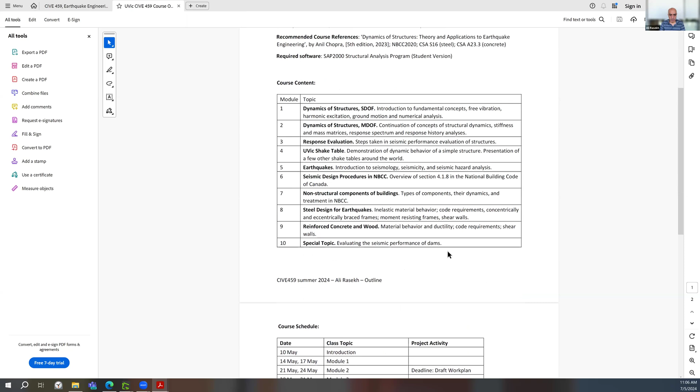Now the picture looks okay, I think we're in good shape. In terms of module, we are somewhere here. We are still working on the National Building Code of Canada between module 6 and 7, and that's the two most important modules of the course. So it's okay if we are slightly delayed.

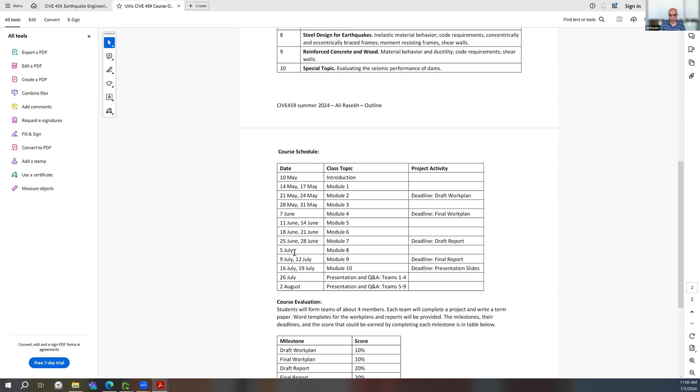In terms of scheduling, we are already into July, and in terms of timing, we are delayed. I will do some other parts faster, as if it's a conference, but I don't mind spending time on National Building Code of Canada. Besides, these two sessions won't be as busy as I initially estimated.

I talked to Benham Siler. I mean, probably mostly my fault - I didn't chase marking your draft reports soon enough. I got carried away by the end of week, long weekend, vacation, etc., and now we are slightly behind.

I'll try my best to give you feedback on the draft report by Monday. However, it would already be late for your July 19 deadline - no sorry, July 12 deadline. So here we said your deadline is July 12.

We give you one week to apply the comments that we give you. So for now, I extend the final report deadline to July 15. Tell me if it doesn't look okay, etc. Let me know, otherwise I can note it here. And I will send an email as well.

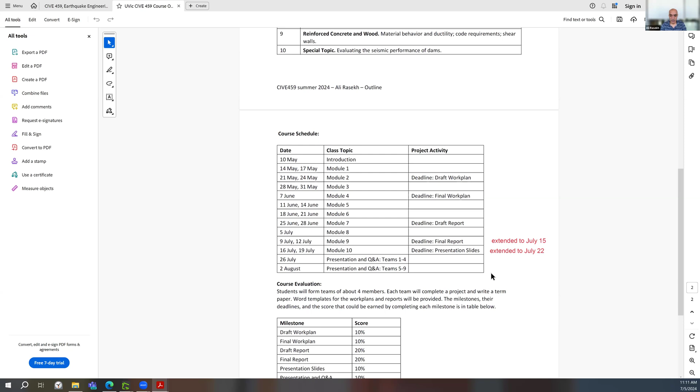General form of the outline will remain the same. Scoring remains the same.

Some questions came up about class presence and quiz. As I said, I emailed back one team saying that as long as I see class presence order of 25 - which is not today, we have only 21 - I don't feel urgency for checking class presence, but now I'm feeling it slightly. So 21 is not yet 25. Maybe some people will join us in a few minutes.

And quiz, yeah. So eventually we should somehow make up this 20%, although I'm not a quiz-giving person, but I have to do it. I committed to it now. I will inform you, maybe next session, next Tuesday - I will email you on Monday and say tomorrow we have a quiz.

By quiz, what we mean is that it will be a simple question, completely fine to check your books and notes and Google search, ChatGPT, etc. However, I'd like you guys not to talk to each other - you should do it independently. It's not intended to be a difficult, in-depth question. That part you are tested through your reports, where you have in-depth knowledge, and you will present to prove that you have in-depth knowledge.

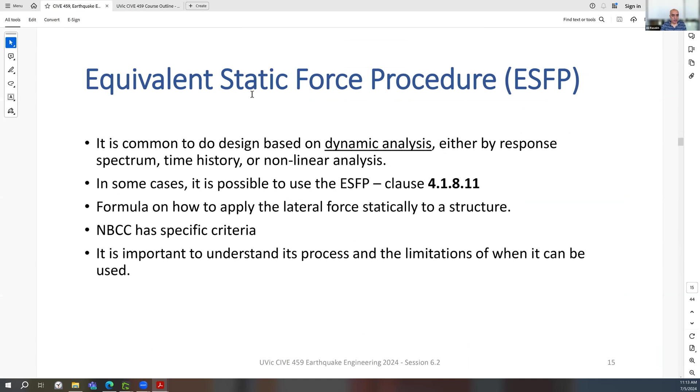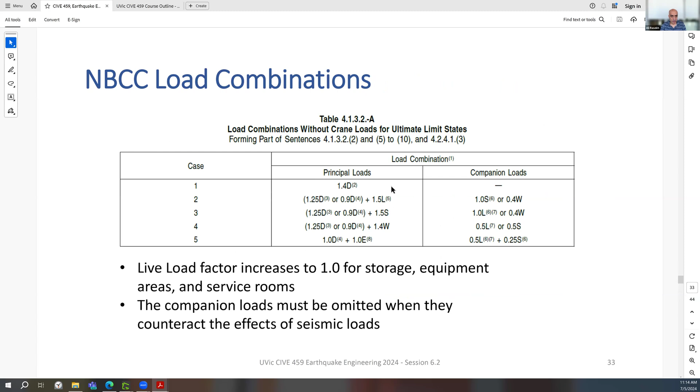Let me see where we can continue from. I remember we went through accidental torsion, and we were at the modern design philosophy. I don't mind going through this one more time.

I highly recommend that you guys really learn and review at least the slideshows for NBCC. Just go through them a few times, practice, etc. I understand some people say they're not too interested in dynamics of structures, but since you're taking this course, you should really be fluent with the design philosophy at a high level for all codes.

We explained the details for using the National Building Code of Canada procedure, the equivalent static method, distribution of the load between different floors, seismic load, and how to modify for higher modes, which meant increasing the base shear and reducing the overturning moment. We went through those processes, and I urge you to more deeply learn that than other sections.

Now we go higher level, to what every code in the world thinks about when discussing design philosophy. This has been popular for maybe the past 50 years or so, using the design spectrum, etc. That's the modern seismic design philosophy, which has been successful, and the quality of design has been improving all the time. This is good knowledge to have as a seismic structural engineer.

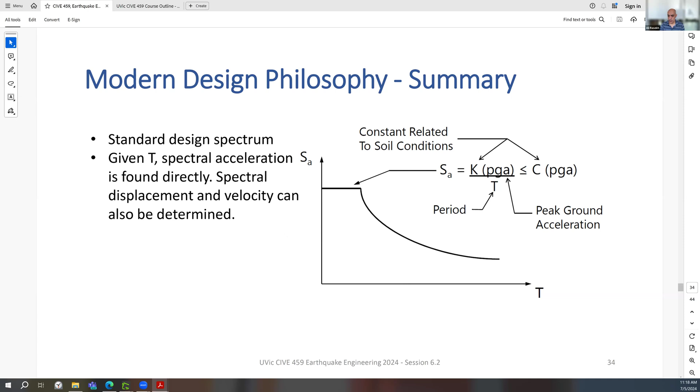Spectral displacement and spectral velocity are also important, and they have a relation with spectral acceleration, so you can determine those as well. That's the general procedure that's repeated in every code around the world on seismic design.

Another important notion to always be aware of, which you should look for in every code including the Canadian code, is that there is an elastic demand spectrum the code guides you to build. It's basically asking: what if the structure remains completely elastic with 5% damping throughout the earthquake? Then the code gives you a reduction factor to reduce it.

Sometimes we don't build this second curve, which is called the elastic design spectrum, because although the nonlinearity is accounted for here, you use the elastic results, elastic stresses or elastic forces. So it remains elastic because when you use this curve and determine the forces, you apply those forces.

on the elastic model of the structure. However, the nonlinearities and ductilities are accounted for by this reduction factor. Most of the time, we don't really build this; we build the higher one. We determine the SAE, and then we use the modification factor or reduction factors, such as what I showed you in the Canadian code, to reduce SAE to SAD.

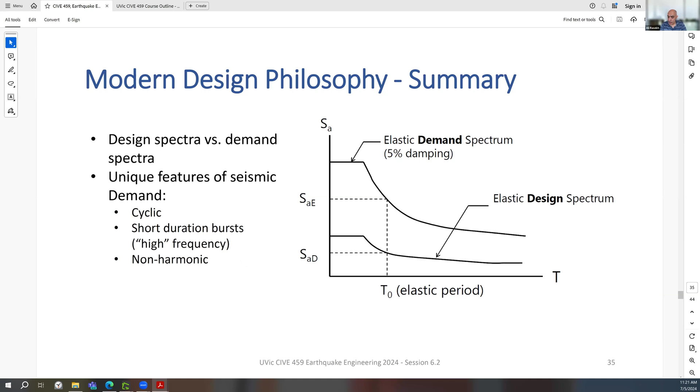Going to the next one, just reviewing the two reasons we use that modification ratio—instead of using SAE to determine the load, we reduce it to SAD. In the Canadian code, they are separated. One feature is that because the structure becomes nonlinear and ductile, the demand reduces.

The structure doesn't remain as stiff, therefore it won't have as much demand. The second feature is the overstrength—while we try to design our structure for one capacity, we're really designing for a different capacity. So the overstrength factor also comes in, and the combination of these two features is where we reduce the demand on the structure: one step from SAE to SAU to account for ductility, and another step from SAU to SAD to account for overstrength. That's the basis for seismic design philosophy in a way.

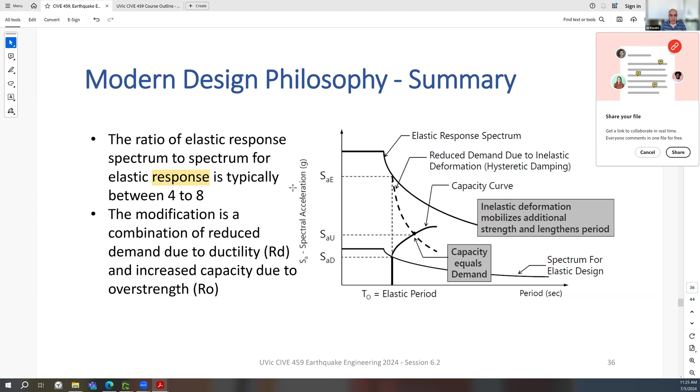And the dynamic characteristics also change. The period normally increases, and in most cases, an increase in period means a reduction in demand—you see these curves like this. So this reduction is partially because the period has increased, and when the period increases, you go down on this curve. That's part of the benefit of ductility, besides the fact that it dissipates energy. So altering dynamic characteristics is beneficial to us.

Normally we think about steel when we see this curve, and that's the way steel behaves: it yields, and then during its deformation, it keeps on dissipating energy. While if you have a member which doesn't yield, energy dissipation is low, there's a higher force, and the period doesn't reduce.

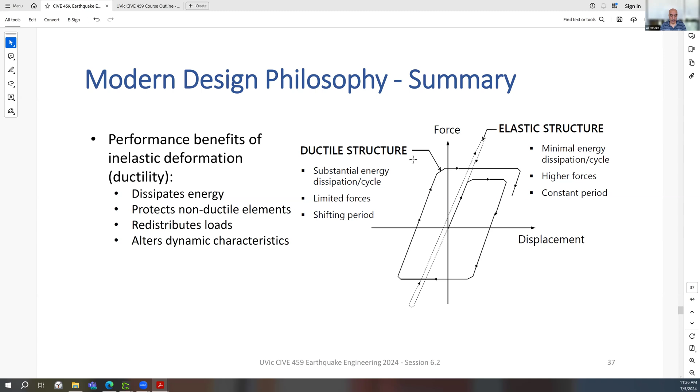For concrete, by nature it's more like not showing ductility, but by providing proper detailing and reinforcing, we push it to behave more like steel. Steel is like our poster child, the ultimate ideal for structural design, and we try to make concrete behave the same, or even wood behave the same—making them act more ductile through proper detailing, connections, etc., or use of steel basically within them.

We talked about the response spectrum curves—the real response spectrum curve, which looks crooked, and one that you prepare using the code, which is a design spectrum, made of a few flat lines in the Canadian case, or in most other codes, a flat part and a curved part, which mimics basically the real spectrum.

Re-emphasizing that even in a real case, when the structure softens and the period increases, we have lower demand. The elastic structure had a period of T prime, but it softened because it yielded. The period increased to T double prime, and therefore the demand is less.

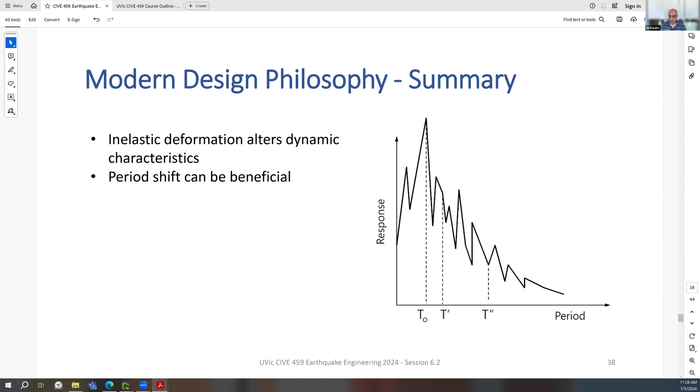We want to have at least one ductile member in between as part of the chain that carries the force to the ground, and we need to capacity protect every other member because we want the ductile member to be what we call the weak link. We want the ductile member to fail in case of emergency, in case of earthquake, because other members will have a brittle failure. We don't like that - it's a sudden failure. The structure might collapse and have more damage to life and more economic losses as well.

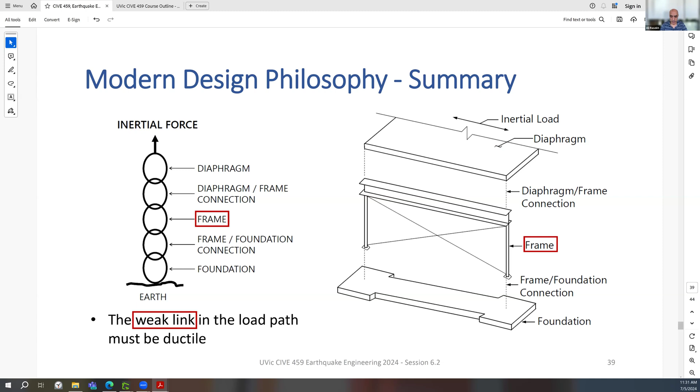So, modern design philosophy in summary, comparing two frame designs: Frame design A and frame design B both have the same stiffness. In terms of the load displacement, they might even have the same stiffness, so the elastic force would be the same for both structures, and frame A has greater design capacity than frame B.

Frame A sustains a greater static load, such as wind load. Frame A yields later, at a greater load, than frame B, and the elastic force would be the same in both frames - both result in the same elastic forces. Frame A has a larger capacity than frame B. Therefore, when you design for wind, you assume that frame A is stronger than frame B.

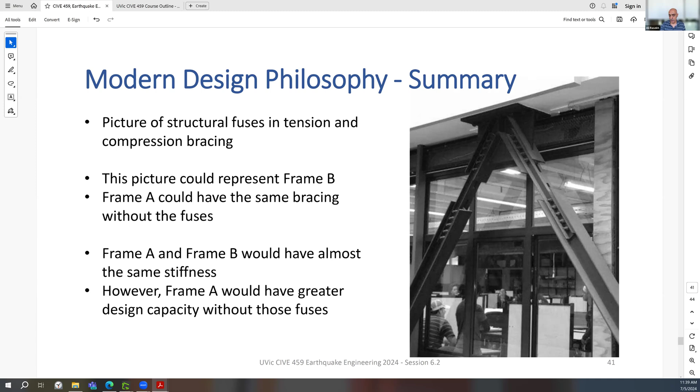So frame A could have the same bracing without fuses—frame A would be stronger, but not beneficial. Frame A and frame B would have almost the same stiffness, because this small change barely affects it, so both structures have the same stiffness. Frame A would have more strength for lateral load, but frame A would have greater design capacity without fuses, making it a poorer earthquake design.

Re-emphasizing the same fact: frame B would act as the weak link, having the capacity to dissipate energy, so the load path will not break—it will elongate but not collapse. On the other hand, frame A would not be the weak link. Energy dissipation will not happen, and part of the load path will be broken because the diaphragm-frame connection will fail. It's a brittle failure, so it will suddenly collapse.

Frame A collapses during a much smaller earthquake event, but this is interesting: frame A satisfies the code. That's an alarming issue—when you design based on the National Building Code of Canada or ASCE 7, etc., frame A would pass. All the capacities will be checked as okay, but frame A doesn't have that capacity protection feature. So you need to learn a little bit more than the code.

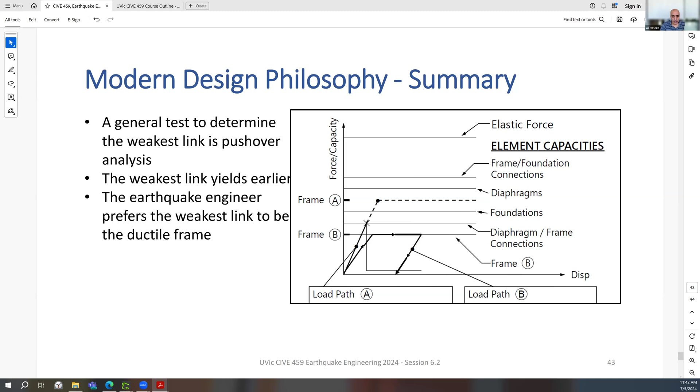Next time I reorganize it, I'll put this slide first to introduce the topic and then go through the curves. That was the most interesting part of our discussion. Hopefully I presented it in an interesting and exciting way. If there's any question, let me know.

Otherwise, we should jump on to the next topic, which is secondary structures. I'll give you about a minute—let me open this. Non-structural elements: I'm calling it secondary structure, but in most codes nowadays they call it non-structural because they are not part of the primary structure. Still a chance for questions.

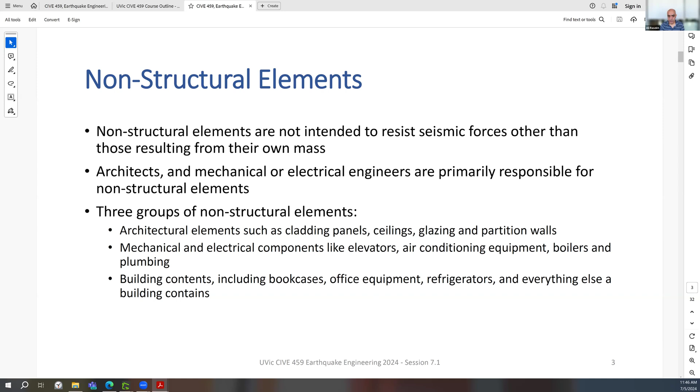Seismic performance of non-structural elements. They pose a danger to people both within and adjacent to the perimeter of the building. Yes, it's possible that some stuff just falls off from a building.

So we structural engineers have designed a nice, stable structure. It doesn't fall off, doesn't collapse. People can run away, but however, something falls off from the building, from the upper floors, and just hits somebody on the street. So that's a life safety issue.

However, generally, buildings are costly, and both structural and non-structural members have been important. However, nowadays, land is super expensive, so it overshadows everything else.

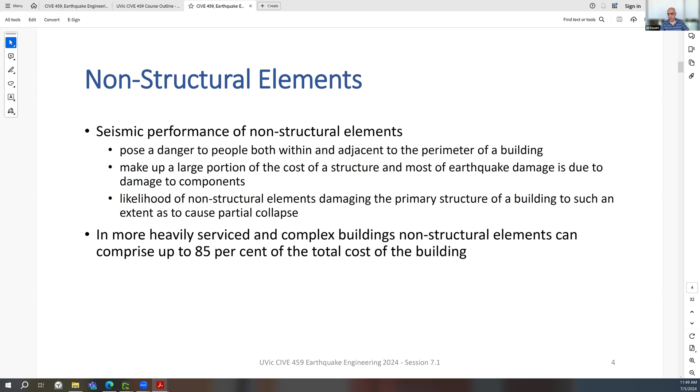That's also a third risk. So it can endanger people, it can be costly to replace, and it can even hit the structural members or damage them. So we will see some occasions.

So the effect of the non-structural elements: when we want to discuss non-structural elements, we should consider that they are at an elevation, and therefore they are seeing a higher acceleration than the base. We will see how the code has accounted for that. Basically, when you are busy designing your structure, you will look at the ground level acceleration or its characteristics, like the spectral design spectra that the code has provided to you.

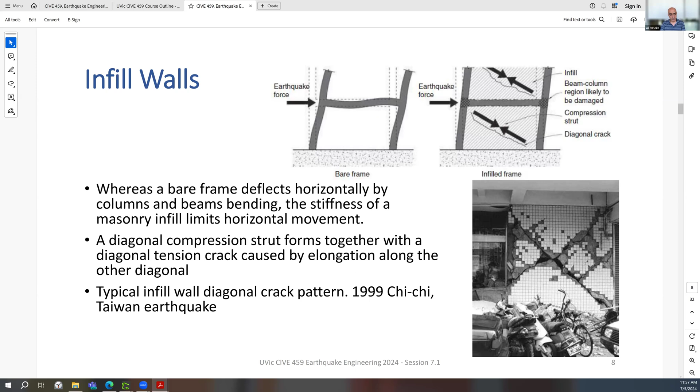Here we have a section with 2 floors and an infill wall. So we have the infill wall here and 2 floors. Out-of-plane forces act on the infill, which spans between the floors. In the previous slide, we showed the in-plane dangers that cause cracks. In this picture, we are showing out-of-plane dangers that might cause the whole wall to fall off onto the floor, or even more dangerously, fall off onto the sidewalk or something.

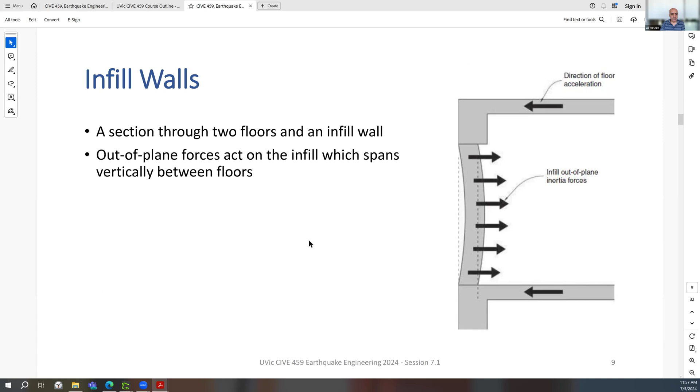So this has happened. Infill wall damage is likely to cause structural damage, as it may hit the primary members of the structure and damage them, including the tops of several columns, due to the infill wall compressive strut. If we carefully look here, some of the concrete members are damaged because of the pressure they sustained from the infill wall.

So we mentioned three issues with infill structural interaction. One was economic, another was that this wall falls off onto people or the sidewalk, which endangers life. And we also mentioned that they may damage the primary structure, which is our primary concern as structural engineers. Although the book says this is mainly the responsibility of architects, we should be very aware, or scared, that our structure could be damaged by a partition or infill wall. That's an example from the 1985 Mexico earthquake.

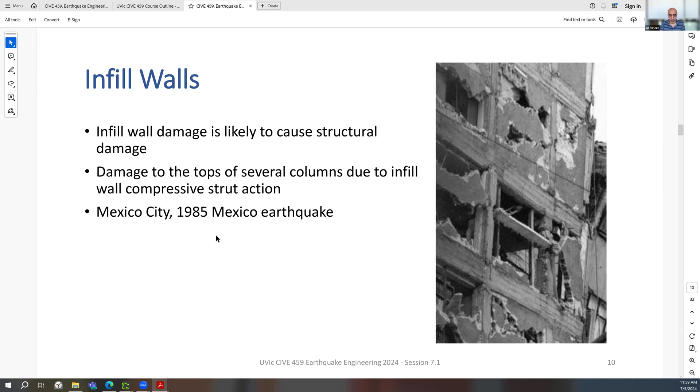Studying the other issues, they may cause losing the symmetry. So again, the structural engineer has considered a very symmetric design, shown by a symmetrical frame building with center of rotation and center of mass at the same location, which is ideal and makes our building regular and easier to design. So we do the design.

However, for architectural reasons, there will be a stiff infill wall here, and that's what the naive structural engineer has overlooked. Because this infill wall is very stiff, the center of stiffness or center of rotation has switched to the right. So when an earthquake happens, the whole building twists, while the engineer designing it assumed there was no twist, no irregularity. But practically it was irregular and twisting, which would have needed more careful design of connections and accounting for rotation. That's what a structural engineer should be aware of.

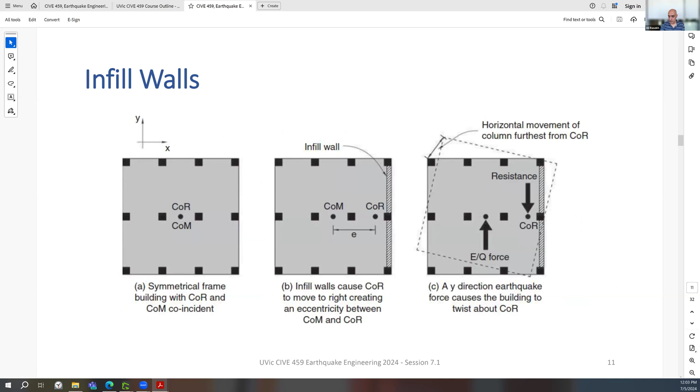Remedy number two: provide a very stiff primary structure. One might think, let's make the structure so stiff that the infill doesn't really increase the stiffness further. But only concrete, or a concrete shear wall, can provide enough stiffness that the masonry stiffness becomes comparable and doesn't affect everything. If the stiffness of the structure is provided by concrete shear walls, adding a masonry shear wall doesn't change the stiffness characteristics as much as it otherwise would. But with steel, it doesn't work.

So let's see what has happened in real life design. This is an office building in Pisco, Peru. Pisco reminds me of the name of a liquor, but yes, it's in Peru. Infill walls were separated as partial height infill in a moment frame, so it didn't go all the way up in the elevation.

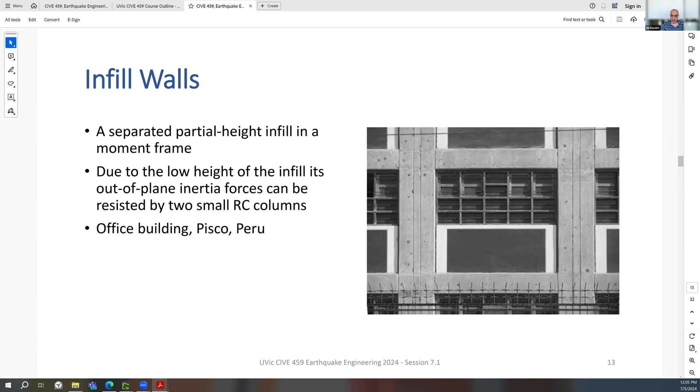Another case study is on staircases. Staircases can act as not-designed braces — they have a bracing action, and a stair connected to the structure would cause damage to the stair support structure and the primary structure.

Say we have a straight flight stairs as shown in this elevation view. What is the issue here? Stairs in this case are non-structural, so they are not really designed to be ductile. We have a brittle, non-ductile bracing unwanted by the structural engineer. The engineer didn't design for it, but during an earthquake they will be under a lot of compression.

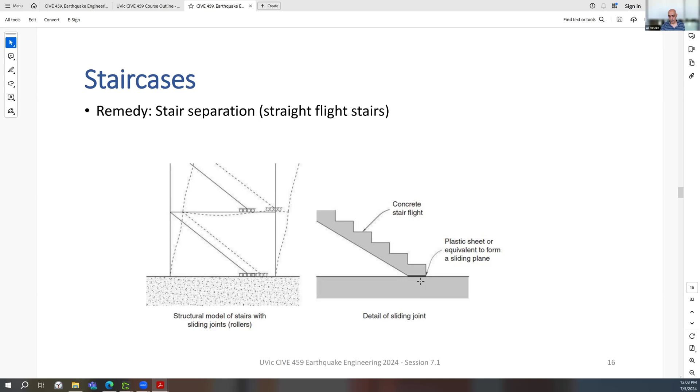This is not a solution to every similar challenge, but we can think about how to prevent the stairs from acting like bracing, and separate them. Let's have a roller here, in terms of structural analysis, that really prevents this member from absorbing lateral force, because the lateral force is separately designed for by the engineer. Say a plastic sheet or equivalent is used to form a sliding plane. So you have a sliding joint, and if this sliding joint is applied, the stairs couldn't really take load because it slides. Basically, these issues would be overcome.

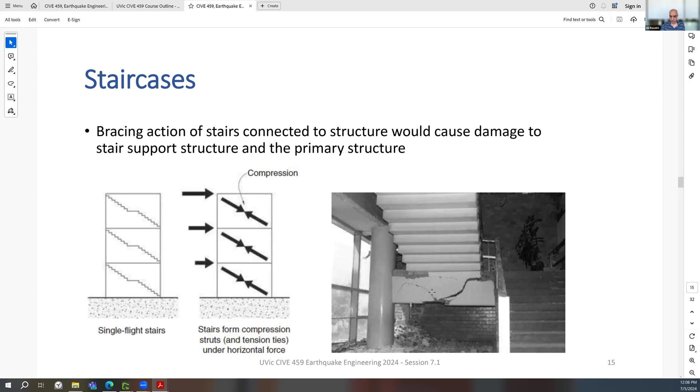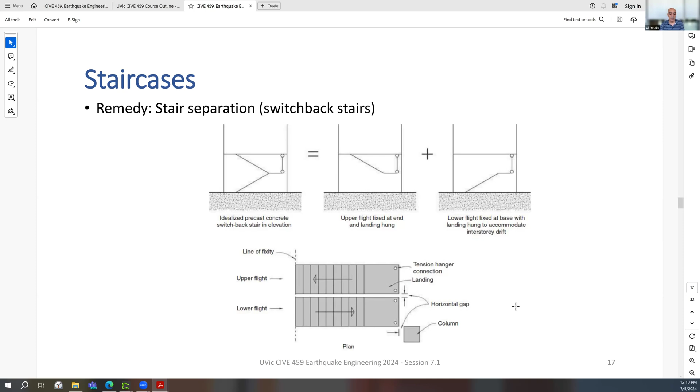Elements of structures, structural components and equipment — jumping into our code and the more rigorous equations that us engineers like better. The code tries to provide a simple equation. That's what the code does: instead of even more rigorous computer models, they provide a good estimate of the loads we can use to design, and then they give limitations on when this solution could be used.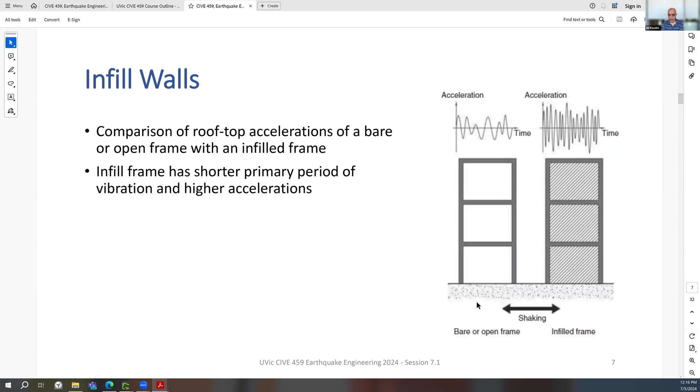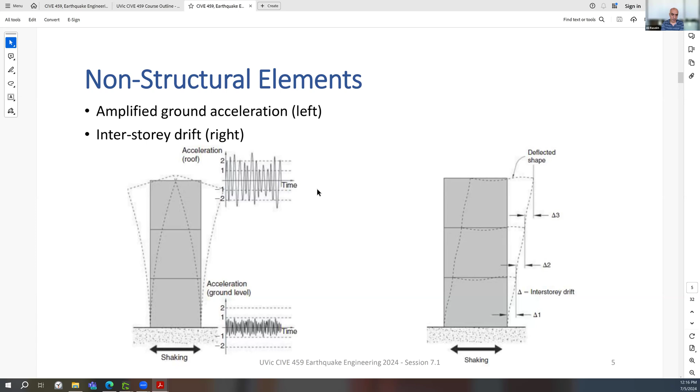Now this amplification - going there again just so it makes sense to you. General amplification: the amplification factor is about the fact that at the base, the acceleration goes to say 1g, however at the roof, the acceleration goes to more than 2g. So if you want to schematically remember this issue, that's what we are trying to estimate.

So that's all we're doing with SP, and the code helps us estimate it more quickly. SP has a few factors inside: CP, which is the element or component factor - there's a table for that, mostly related to stiffness. AR, the element or component force amplification factor - there's a table for that too, meaning how much amplification I get within the member itself, within the shelf. Then there's AX, the height factor, meaning how much amplification I get because I'm not at ground level, say I'm on the 5th floor. AX gives a simple estimate of how much increase to account for because of elevation.

Again, similar to what we previously discussed, there's a reduction factor because the anchoring I've used to connect my shelf to the wall has ductility - maybe it's steel, whatever, and it has ductility. Because of that ductility, using the same concept we reviewed, we can reduce the force. And WP is the weight. So it's almost the same concept as before, however here we have an amplification factor, and there's a limit - the max and min determined by the code. Be aware of those max and mins. The code really tries to help us get a quick estimate of the force to design anchoring of the equipment.